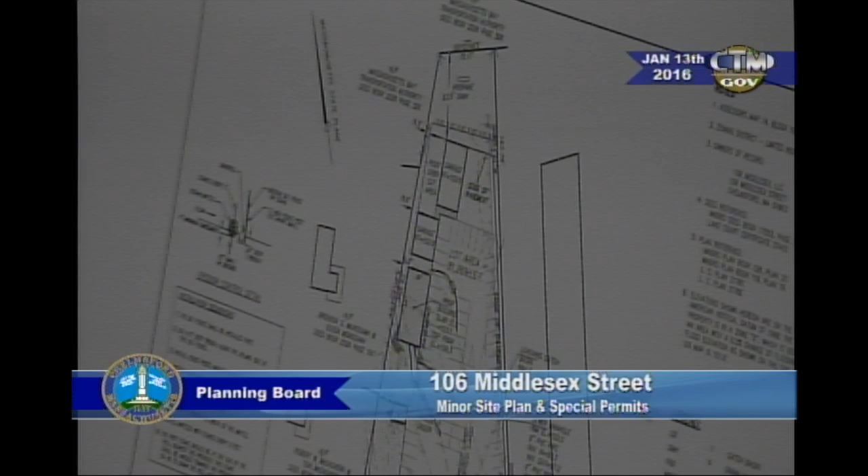They will also be repurposing a hallway to accommodate an elevator shaft through the existing ground floor. The new addition will provide a direct exit from parlor number 4 to the outside. There'll be a covered drop-off area, 21 feet by 28 feet, consisting of an open roof structure with decorative columns supporting it.

The elevator is being added to make access between floors easier. The enclosed elevator shaft will be on the north side of the building, about 10 feet by 15. The exterior will be treated the same as the rest of the building to blend in with the existing structure.

The second part of the project is a garage, a new building on the northwest corner of the site. It's a prefabricated metal building to match the others. The footprint is 32 by 54, 1,728 square feet. It will be 17 feet tall at the tallest point, and the new building will sit between two existing garages on the site.

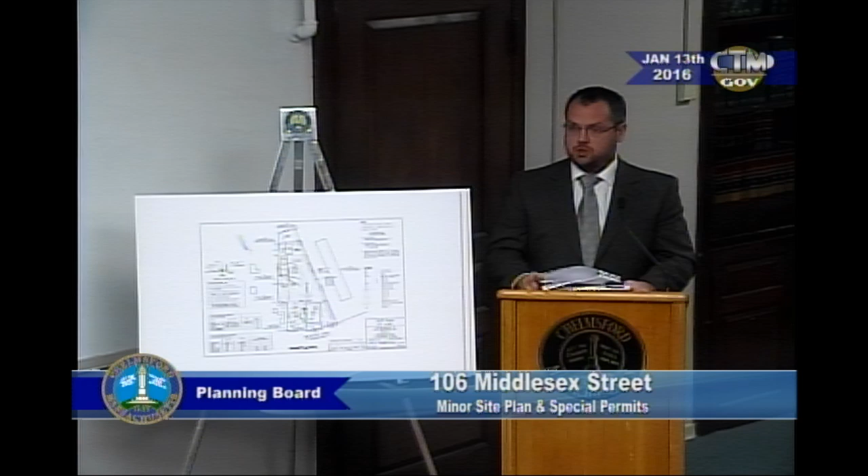Should I go over the items on the civil? We had the site plan, with all the corrections from the town engineer's comments incorporated into this last edit. Would you like me to go through the items on that?

Why don't you point out what we're adding there? I think I see it here, but what are we adding? I can see that, it's in here, adding this right here. I'm not worried about the elevator, I'm just generally worried about the bill.

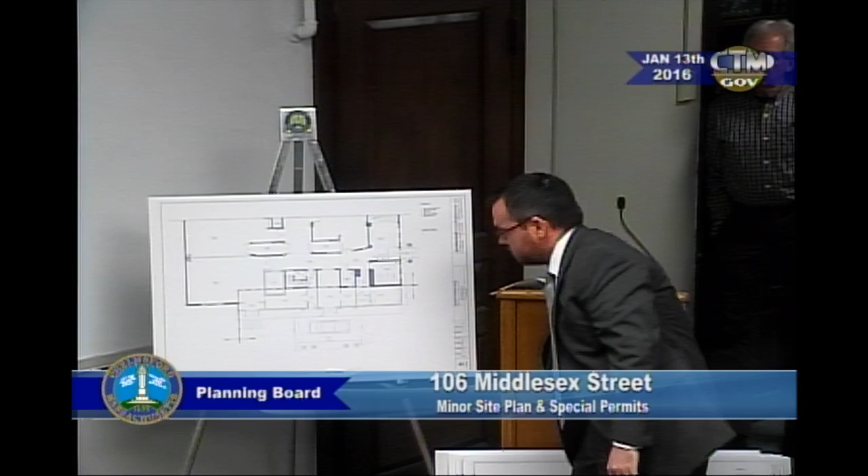This is the basement plan, so everything below the red line is the new footprint that will be in the basement level, an unconditioned space there. On the first floor, everything here will be new. There's a men's room here - this was formerly the men's room, so we're making this a hallway with a janitor's closet.

There's a coat room, a new entrance basically in the same spot as the existing glass airlock, a hallway to connect the stair, a storage room, and the new door here - this is the elevator. So basically all the pieces being added are just to increase the comfort level of anybody at the facility. We're not increasing any assembly area for this project.

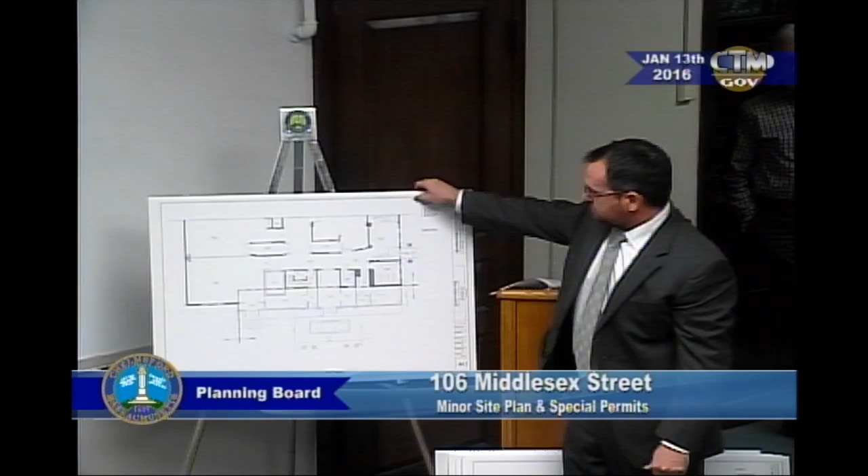This is the covered portico right here. And on the upper floors, this is the elevator shaft with a small vestibule there.

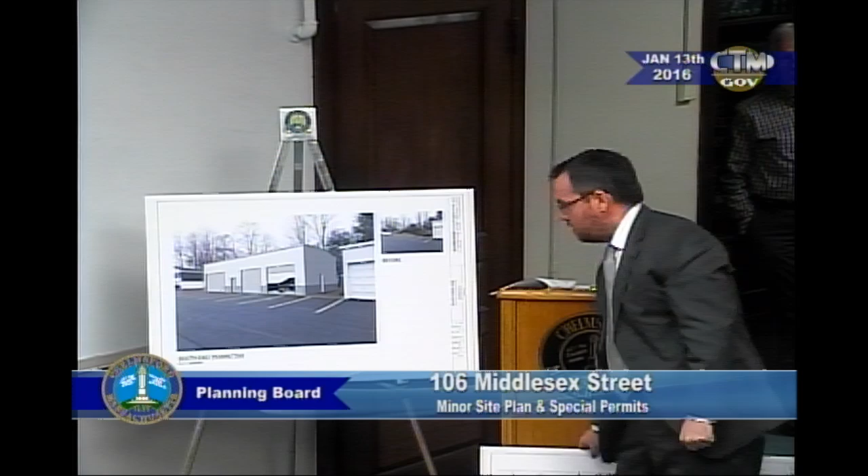I'm happy to go back to any board. Is that a 4-story elevator? It will go from the basement, it's a 4-stop elevator, from the basement up to the 3rd floor. This is the approximate floor plane of the 3rd floor - due to the perspective, it's sort of hiding the 2nd floor a little bit. It will potentially project a little bit from the roof of the building, but not too much.

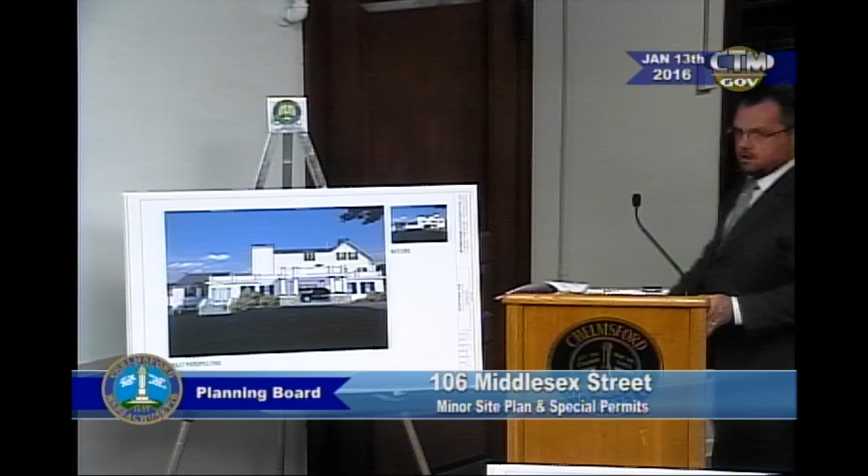Yeah, I'll go first. I do have questions about the parking, and I see that at least the entrance and egress of the site has been clarified, so thank you for doing that. I see that still some parking is going to have to be eliminated - how many spaces?

Basically, they'll be eliminating 10 spaces from the existing parking lot. We did a minimum parking requirement count off of the zoning for Chelmsford, and it does seem that we meet the minimum required of 77 spaces, with currently about 104 on site. So with removing the 10, which is a conservative number, we will still far exceed the minimum required on site.

The elevator, where's the high point of the elevator, is it under 35 feet? It doesn't project any higher than the existing house, does it? No, it shouldn't.

The only thing I got is snow storage, what do you plan for that? He has an area out back. There's a large paved area that I believe is the storage area that is not striped for parking. Okay, down back next to that last garage? Yes, is it where the propane tank is?

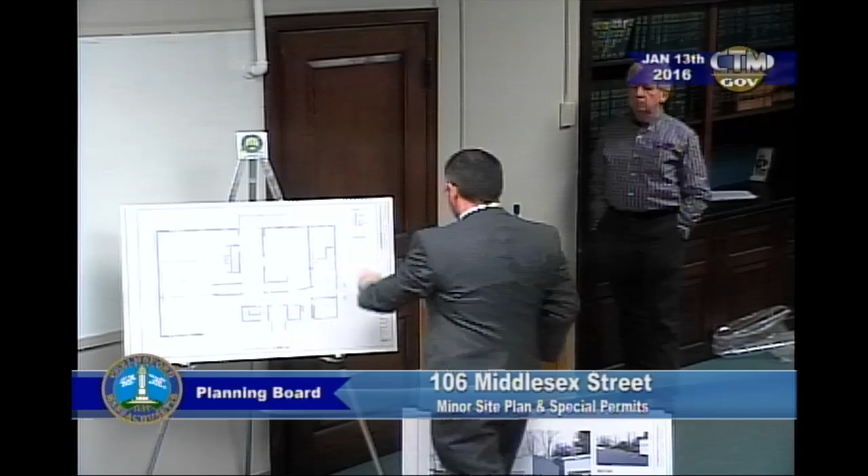My other concern, which you've somewhat addressed in the new plan, is the distance from the back of the garage to the house directly behind it, which I believe has a pool behind it as well. I know there are existing garages along that line, but it's not really a direct view from the back of that house. So the question is, how far is that house, and is there room to get some arborvitae back there, or something to soften the view to that residential property?

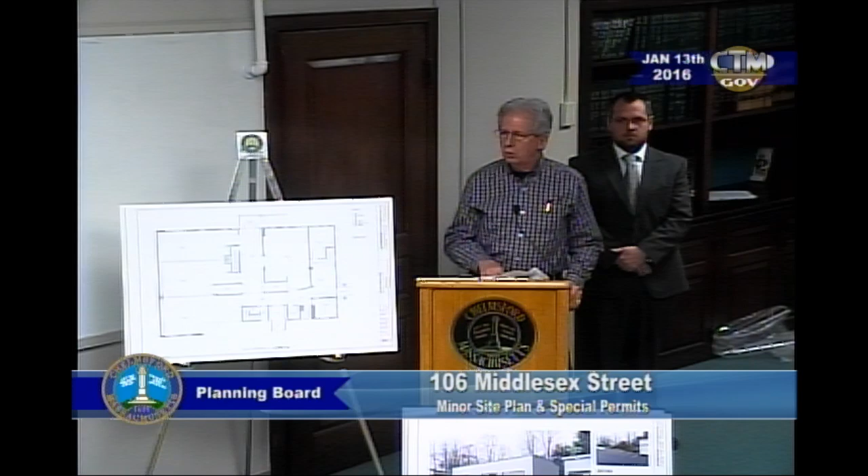My name is Jeff Hannaford, I'm with Norse Design Services. You're talking about the house directly opposite the new... Brendan McGovern. Okay.

I don't know if the picture down here, the before and after - can I see that one right there? Yeah, can I see it?

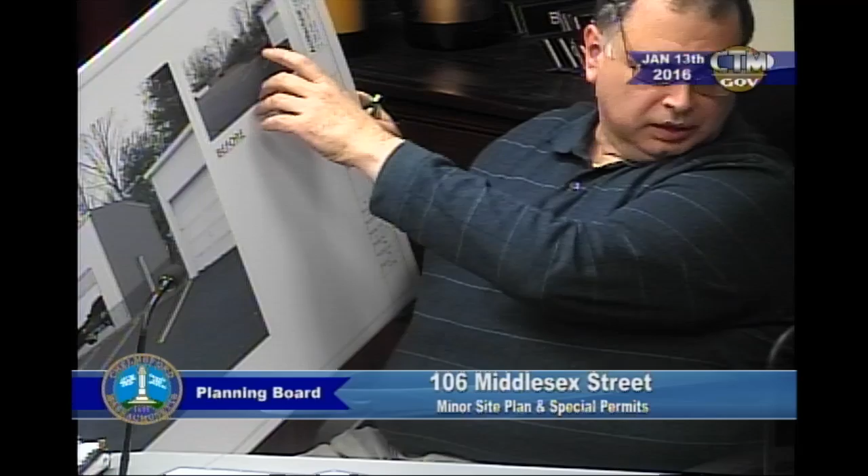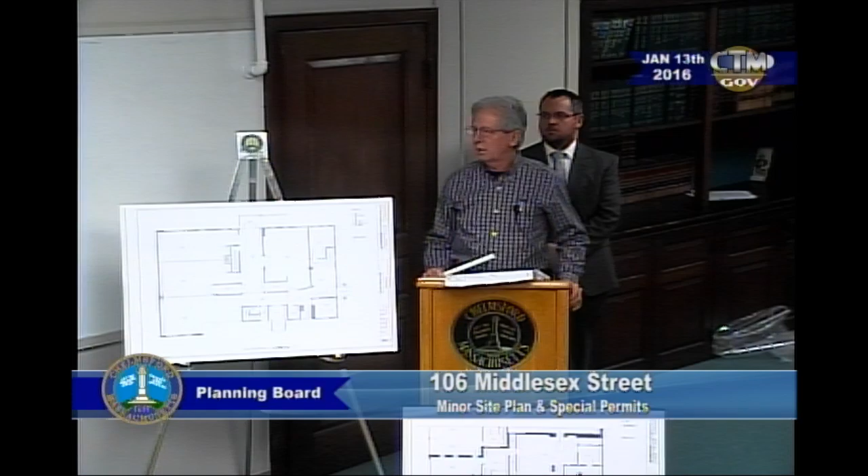So on your picture here, are these trees staying, or are they on your property, or on the owner's property? They're on the owner's property. The existing house is approximately 85 feet from the property line, so it'd be about 95 feet from the back of the proposed garage. Are you losing all those trees back there? None of them. You're not losing any?

Okay, I'm good. You can have that picture. Unless the board might want to see it. Yeah, might want to. No, show it. I can see what you mean, yes, I understand. Yep, I can see it. Got it. Okay.

Ed, you had another point? Yeah, just going back to George's point on the traffic flow.

You've got this as two-way traffic on both sides of the funeral parlor. Maybe you can consider this - I actually thought it was one-way flow myself. Maybe you could consider making this one-way counterclockwise flow around the funeral parlor, and that might answer George's question. I'm not expecting an answer now, I'm saying consider it.

When I've gone there, I always go in on the right-hand side of the funeral parlor and kind of swing around. And it seems like everybody's doing the same thing, so the natural flow might be that way.

And the other thing is just basically a compliment. I think over the years Dolan has done a great job with this property. I can remember when this was Proctor Lumber - long time ago - and the front part of the funeral house was the main office of Proctor Lumber. So that's a long time ago, but they've done a nice job with the property over the years.

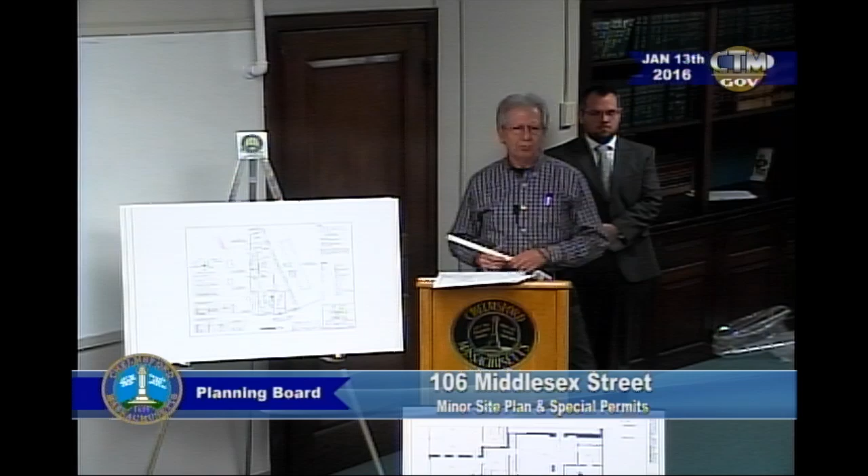Well, I'd certainly bring that up with our client. It was one of the questions in the engineer's review. So when we looked at it, it really isn't marked out in any particular fashion, so without any specific direction to motorists coming and going, it could be used any which way right now.

If we marked it out one way, it might solve the concerns. Yeah, I know your comment about having a walkway or adequate room for people getting in and out - that was one of his concerns. So for the portico, his instruction was to make it wide enough so that when somebody pulled in and opened doors to let people out, they had ample room on either side so people were safe and could get in and out easily. I think if you look at it, you see if there's some way to either mark it out or put a walkway in.

He definitely wants one way under that portico. I don't know if he has a particular desire which way, but I know it's supposed to be one way. Maybe we could do clockwise instead of counterclockwise - that might work better. That might make sense. Yep.

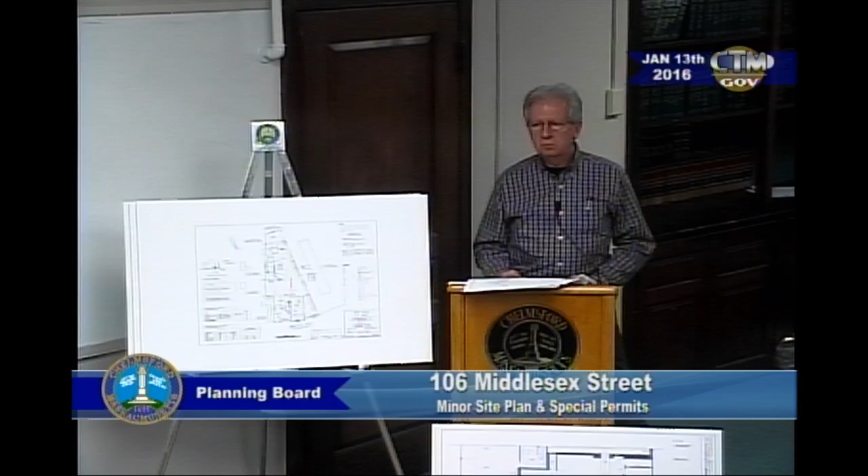And while I'm up here, I will say that I got the town engineer's review comments this week. The plan you have in front of you addresses that. Since I'm up here, if you have any specific questions I could go through them one by one. Even though there were a number of them, were they addressed? Yeah, minor in nature - they've been addressed, I'm pretty sure. I don't have any particular. Let's see, anybody else have any questions?

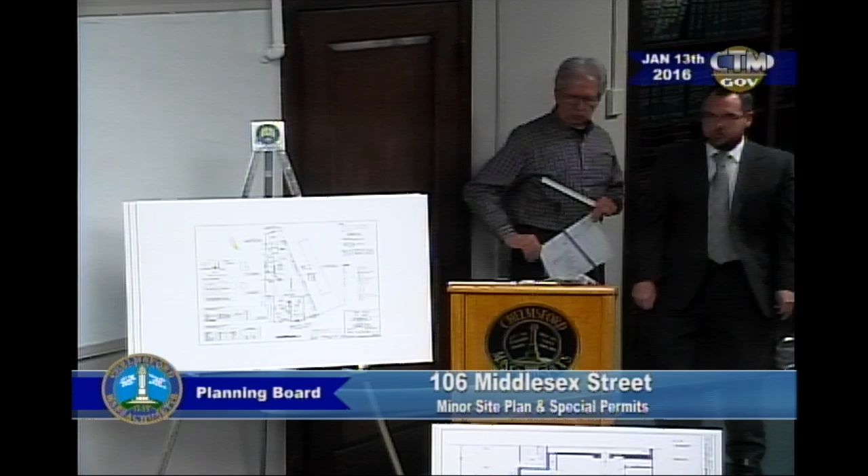I had one - I just wanted to verify the height of the proposed new garage. Is that essentially the same as the height of the existing garage? It's a little lower. Okay, so the new garage is 17 feet at the ridge and 16 feet at the lowest point of the roof. I believe that's very similar to the existing garage, except it is slightly higher on the hill.

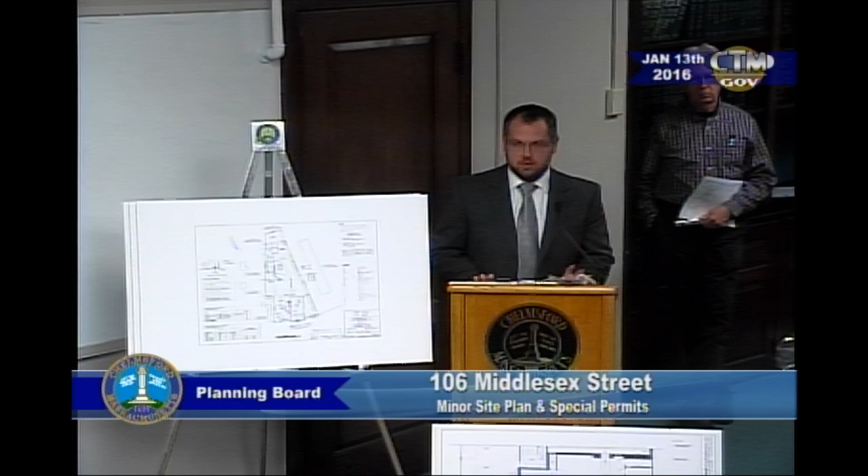The hill does slope very gently down towards the railroad track, so I think they're very, very close. I can see that - okay, anybody else?

All right, you did have a comment about a question about the garage and the grading, and that was also on the town engineer's comments.

As far as proposed grading, when we looked at that proposed garage, the back of it is going to be built into a hill. Because it was a prefab building, my concern was that we would need a separate retaining wall around the back of the building to hold that hill back. In talking with the architects, the solution was to use the foundation as a retaining wall, so the foundation wall in that area is actually going to be higher than originally thought. That will minimize any adjustment of grades. The only other proposed grading is associated with that building, nothing associated with the addition on the main building.

But as you can imagine, the garage has to have a level floor from left to right. The existing grade does slope slightly, so that grading will be adjusted immediately in front of the garage. It'll have to be cut out and repaved to match the new garage floor elevation. But they will be able to still continue to park in front of it, just like they do all the other garages, because they don't need access to it during any of the assemblies.

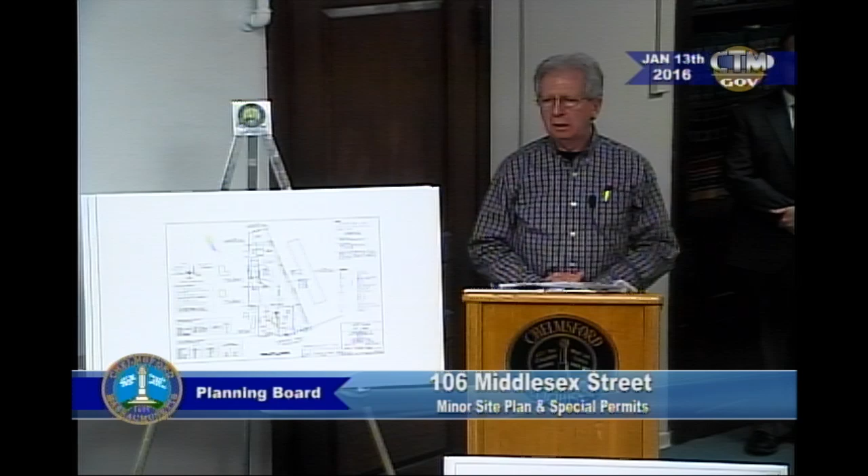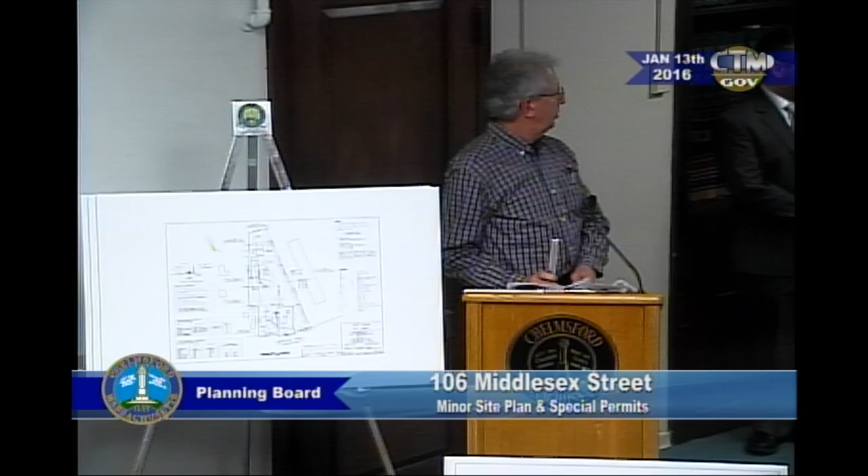Follow up on the garage. What is the intended purpose of the garage? Is it strictly for storage, or are they going to do repairs in this garage? I believe it's just storage, just car storage - the funeral vehicles. He's got some at his house, some at other houses, consolidating them all. So if it's strictly for storage and not to be used as an auto repair shop, I'm fine with it. I think that's something where we get surprises once in a while.

Once more around, and then I'll open up the public hearing.

All right, well, this being a public hearing, is there anybody from the public who would like to comment on this? Nobody? All right, seeing none, I'll leave that open for the moment.

Let's see, we have minor site plan, and there were 2 permits in here, Devin? One minor site plan and one special permit, one for the detached garage.

And when are you going before the ZBA on the variance? They haven't scheduled it yet. They wanted to appear before you first, but it'd probably be March, the first meeting out there. And when would you anticipate beginning construction? I presume that's in the spring? Yes.

So I just have a general question, 'cause Nan actually brought it up. What's the difference between recorded land and registered land? Same thing - one you have to go through land court, and the other is through the local registry of deeds.

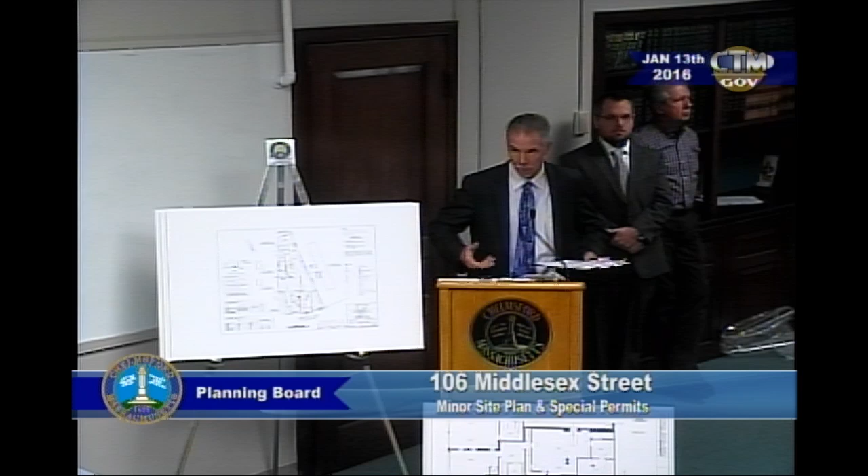One other last thing - in terms of the other comments on the package we received back, the owner has asked us to consider applying for a waiver from the fire department requirement. So we may pursue that, and I don't know if that needs to be part of the notes from tonight. If they're satisfied, we'll be fine. Actually, I think it has to be.

Because if we vote based on accepting their letter, and it says the standard sprinkler systems or whatever it may be, then if they change it, does that affect our decision? Well, I think we would need another letter submitted specifying what they want.

Normally, almost 100% on fire department stuff and all other departments, we require them to be satisfied. So before we usually vote, we need a clean letter from the fire department that says all the details. If you're increasing the size of this and they think you need a sprinkler system, you've got to hash it out with them as to what the NFPA requirements are. That's usually how we handle it - we don't overrule the fire department very often. It's not our modus operandi.

That said, I think the appropriate thing here is for us to continue this to the next meeting. You opened it to the public? Yes, we have had nobody step up. We can leave it open, and if somebody wants to speak to it at the next meeting, we can certainly let them do that. I would just like to see if they have enough time to work on the waiver, to continue it to the 27th.

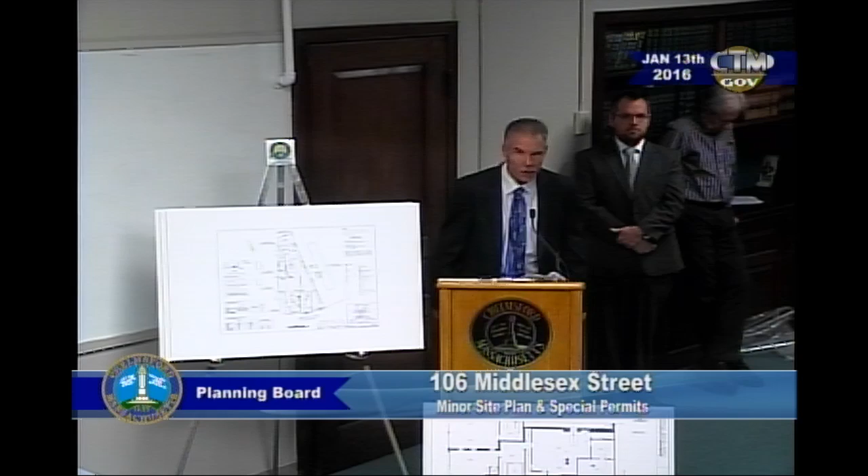Is that enough time for you? Normally, we continue it for 2 weeks to our last meeting in January, 2 weeks from now. You tell us if that's enough time, or if you want to go to the meeting in February. I think that's enough time. If you don't have enough time, you can just submit something to us before that meeting and ask for a continuance, and we'll certainly grant it.

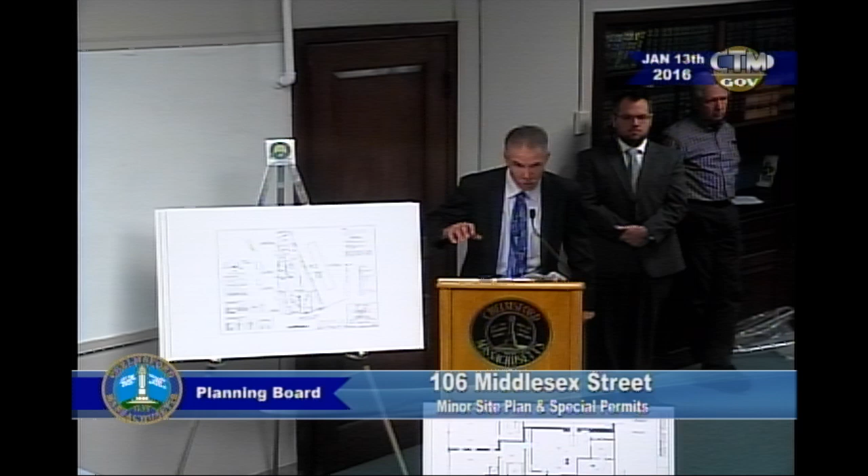That's great. I think also we wanted to ask, in terms of a continuance, would it be possible, if we're just talking about the funeral home as opposed to the garage, to get the garage piece approved tonight? Actually, I think that's a matter for the zoning board of appeals more than us - right, because of the setback. We'd want to handle it all in one transaction since this is a minor site plan. Well, you're doing a special permit for the detached garage, over 900 square feet, so that's going to be a permit by itself.

We usually do it all at once - that's our preferred mechanism if we can do that. But if you can read between the lines, I don't see much opposition here. I don't think you've got a problem. If you're concerned about timing, what we'll do is we can expedite the ZBA. There's nothing preventing you from submitting that tomorrow. You can probably get on the February 4th date. We'll be in contact with you tomorrow. All right, terrific.

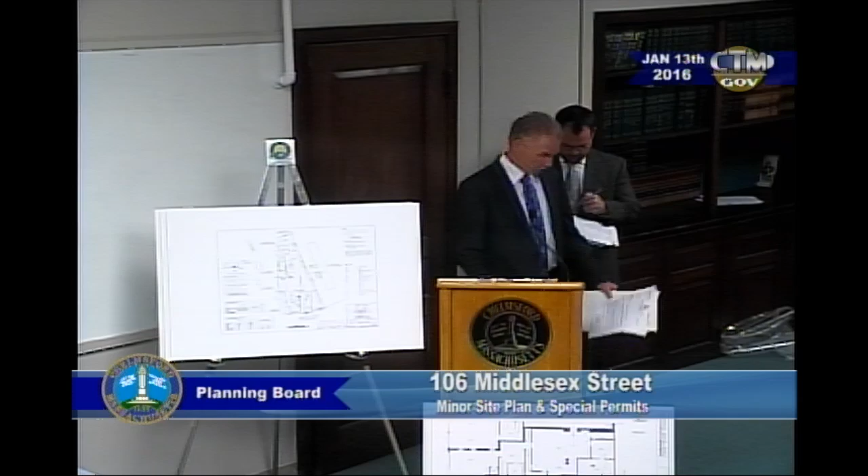Motion to continue - I'll make a motion to continue Planning Board 2015-21, 106 Middlesex Street, to our next regularly scheduled meeting, which is January 27th. I'll second it. Moved and seconded, all in favor? Aye. Opposed? Okay, 5-0. Thank you, we'll see you next meeting.

The next one up is a continued public hearing on 54 Bartlett Street.

Thank you, Madam Secretary. These are all the same. Ooh, Colleen's trying to give me a hard feeling - yeah, she put, they're all the same paper. There's like 40 copies, I'm like, you're killing me here. I'm sorry, you meant to pass those on to the board. It's gonna show up in the review. Oh, give me one more. I'll pass it down to Monica. Thank you, gotta read each one. Like, whoa.

Excuse me, okay you're up. I'll read this one real quick. From the fire department: Dear members, I've reviewed the proposal of the subdivision at 54 Bartlett Street in Chelmsford, and I find the following.

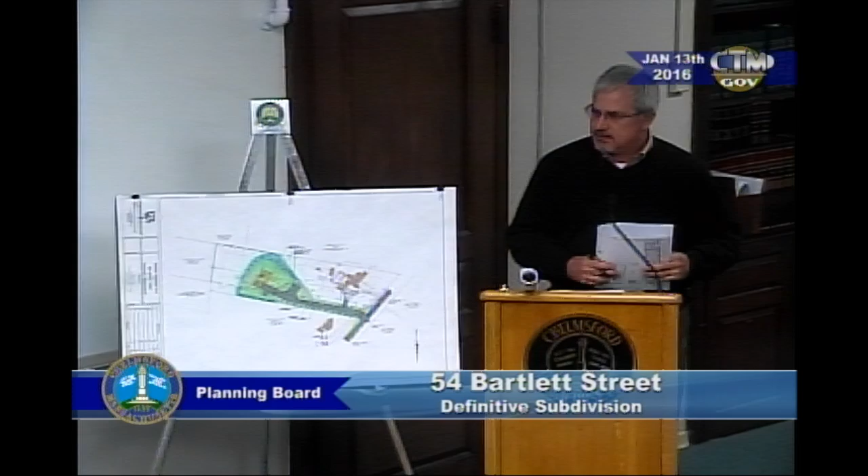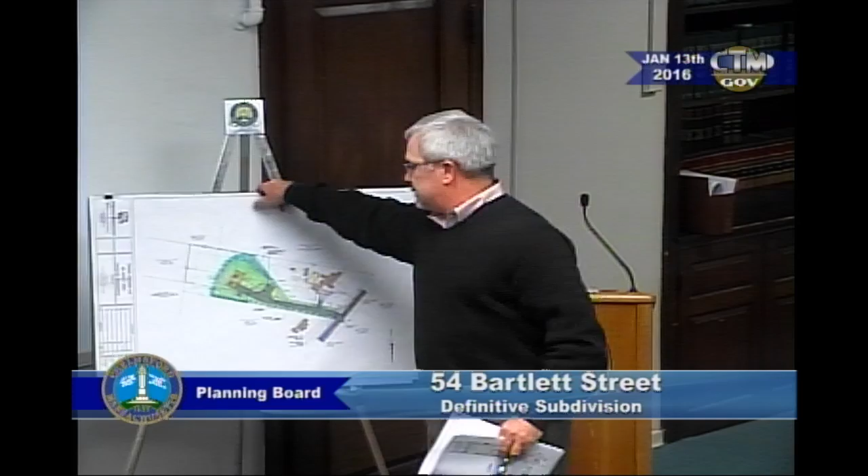Good evening, Mr. Chair, members of the board. For the record, my name is Brian Milisci with Whitman Bingham Associates, here representing, and with me tonight, Deborah Dunn, on 54 Bartlett Street. We were in front of this board 2 meetings ago, and if you remember correctly, we had provided a plan that showed a fairly large amount of pavement.

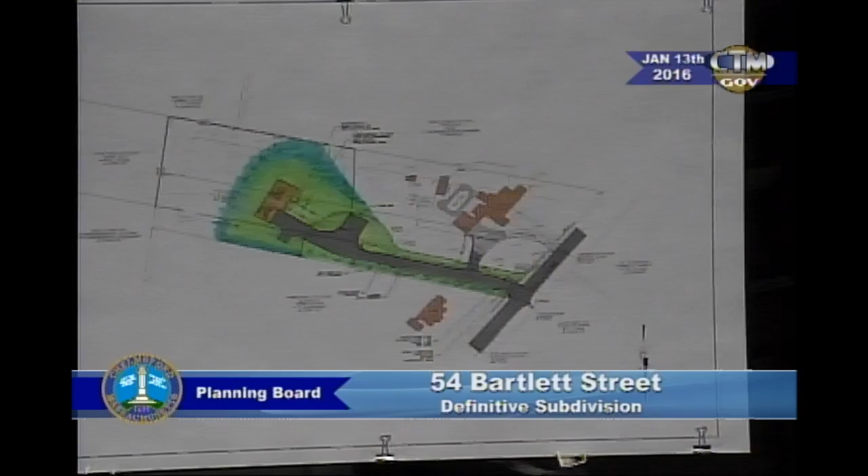Kevin, if I misspeak you can throw something at me, but from what I understand, following that meeting, Evan, Steve Yonley of the engineering department, and Captain Dan Katsufis of the Chelmsford Fire Prevention Department met and went over this. What came out of that meeting was the letter you just read, and Dan sent us a copy as well. The crux of the meeting was that fire prevention is okay with the 14-foot wide pavement width we had originally proposed on the plan, which the engineering department said was of adequate width.

What he did ask for, first and foremost, was that the new house be sprinkled - meaning have a sprinkler system attached to it like you would see in commercial, retail, or industrial type buildings. It's been unusual. I went over it with my client, and she is amenable to that.

To let this board know, I talked to the water district to find out how he wanted me to plumb it, and I don't know if the details needed to be shown. Typically what we would do as engineers, on a residential sprinkler system, is provide an oversized service - we'd upgrade the 1-inch service shown on my plan to a 2-inch service that would come into the house to feed the system, and then come off of that with the 1-inch domestic service.

Typically what would happen is it's more of a housekeeping item - if someone didn't pay their water bill, you could go turn off the domestic service, but the fire service would stay alive to the building. It's a residential home, but that's typically what that's for.

I talked to Mr. Tanzino at the Chelmsford Water District. He said he can only remember one other instance where they put a sprinkler system into a residential home. He was going to pull the file and get back to me on exactly how he wanted me to plumb it. I just wanted to let you guys be aware of that.

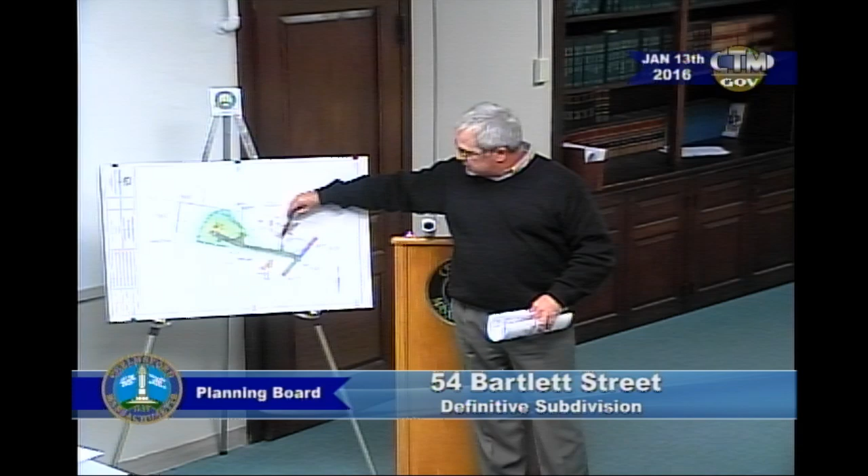One of the items that was brought up on the community development review letter, they asked us to look at removing the existing curb cut for 54 Bartlett Street and tying the existing driveway back in, making the driveway here a true shared driveway. This plan does show that.

However, we'd like to point out there are actually 4 fairly large trees in this area. One of them gets really close to the proposed driveway. We may not be able to save it, although we're going to try. The driveway would have to skinny right between a 12-inch spruce and a 30-inch pine. So the bottom line is we'd like to try to keep that driveway out onto Bartlett Street to save some of those large mature trees.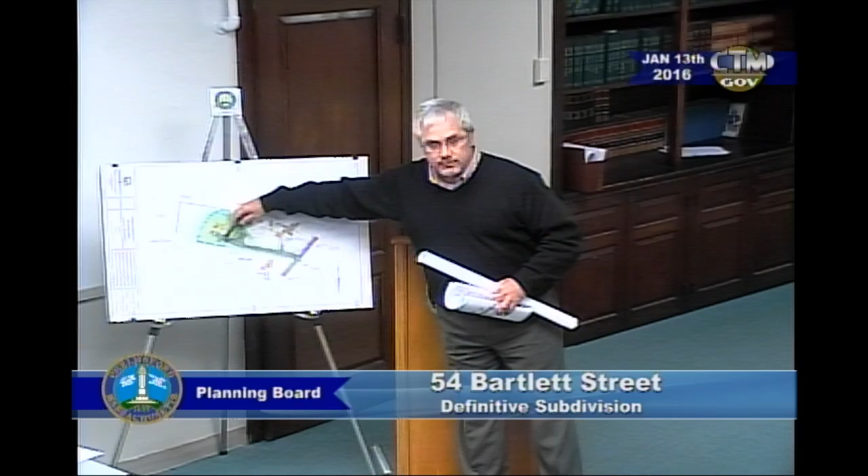We can do it from an engineering standpoint, it certainly can be drawn and constructed. We'd like to ask the board their consideration to leaving the driveway there and just having the new driveway service one home. Can you flip it so we can see what the old driveway looks like?

Okay, I see what you got. So that's the old driveway. If you go out there today, this is the existing driveway that services 54 Bartlett. There's a little bit of a spur here for coming out of the driveway, where you can pull out and maneuver around. I believe it was Evan who brought it up, asking maybe we can connect these, and we're just trying to save some of those trees.

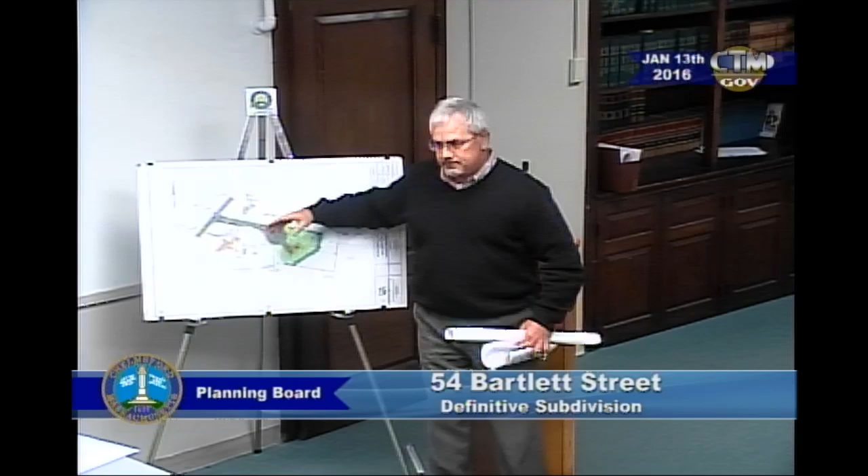The other thing that was brought up, I believe by some of the abutters, was the green space between the edge of pavement and the property line through here.

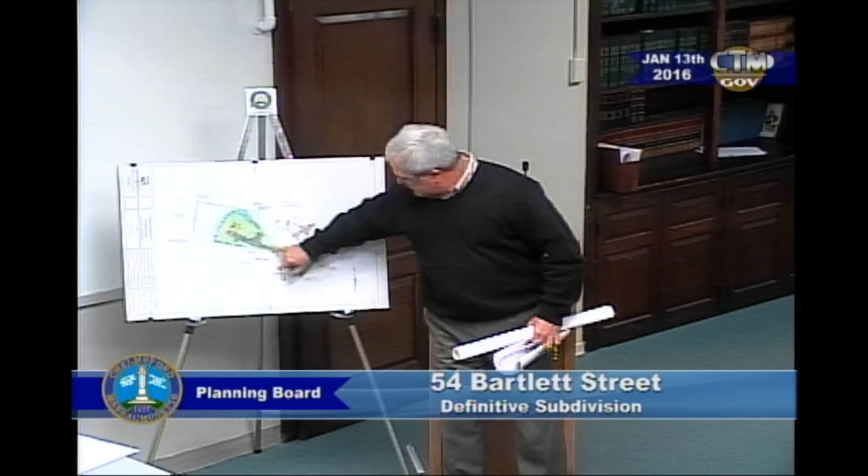This board had asked me to stake the center line of the road and stake the house location, which we did. We let Evan know that it was done. I don't know if any board members have had a chance to go out there and view that, but there was talk about maybe putting some arborvitaes out there. I believe after the meeting the term came out that this really isn't an arborvitae neighborhood.

We're certainly amenable to putting some landscaping there, hydrangeas and some azaleas that Deborah said was on the property now. I believe it's hydrangeas. So we would put some hydrangeas and whatnot here to try to soften some of that edge between the driveway and the abutter. In a nutshell, that's it.

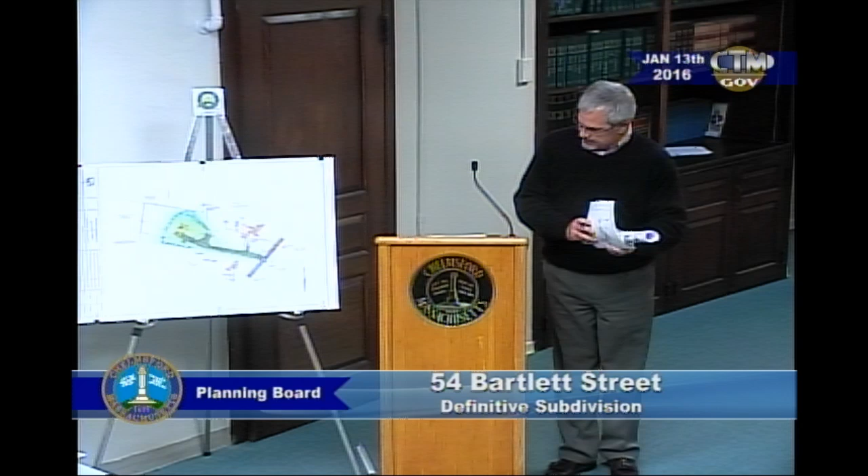We were kind of waiting for that volley back from the fire department to see whether they were going to be amenable to the 14-foot wide driveway. I talked to Captain Dan, I believe, on Friday when he wrote that letter. So we're here in front of you with that.

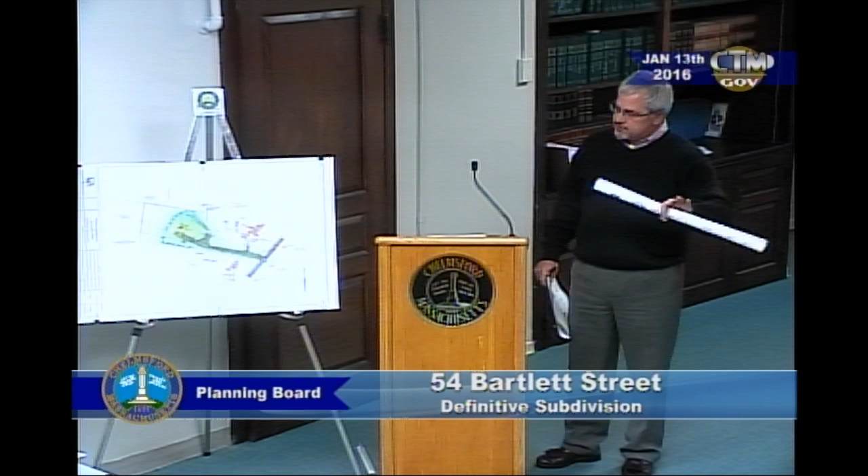I do have small 11 by 17 portions of this plan and a couple large ones. I do not have an entire set of plans that have been revised yet. I was hoping to see if there were any comments from the site walk, that we might be able to incorporate one last revision onto the Mylar plans, and hopefully get an approval. That's what I have.

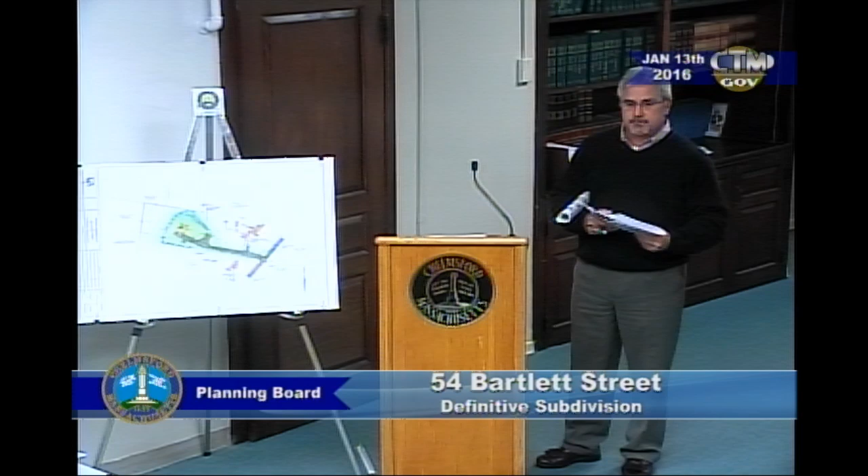Just, I guess this is more towards Evan. So, well, maybe Brian can get the better answer. So this is the new trade-off: if we go to a small driveway, the fire department's now requiring a full-blown sprinkler? This is the new trade-off?

So we had a meeting, as Brian mentioned, and the Massachusetts Comprehensive Fire Safety Code apparently was amended probably late 2013, early 2014, became effective immediately, and they've been going through trainings and so forth. But the new change is fairly significant. It defines what a fire department access road is, which the fire department is interpreting to also include driveways. In this case, it's not just a driveway, it's also a private road.

Right, it's a private road. And so it indicates that a minimum width is to be no less than 20 feet. It also has some other design standards, and it gives the fire department discretion to modify those standards with the condition that they can require sprinklers. So generally the concern is the length of the access road from the main road to the point of the structure.

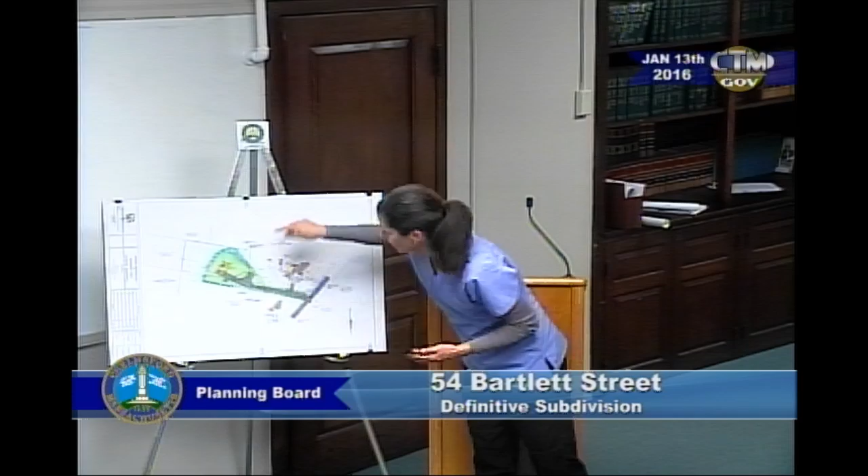May we flip this over to the other side? So when you say the shared driveway, can you explain that a little bit more? It would be Deborah's driveway and... is it okay, Mr. Chair, if I just kind of respond directly? Yeah, please do. The shared driveway part came through one of the comments from community development.

Rather than Deborah's or number 54 having their own driveway, this portion where it's shaded would have been removed - that's the existing driveway - and a new piece of driveway would have been built here, so that when someone was exiting number 54 or coming in, they would exit onto the new road and then go wherever they were going.

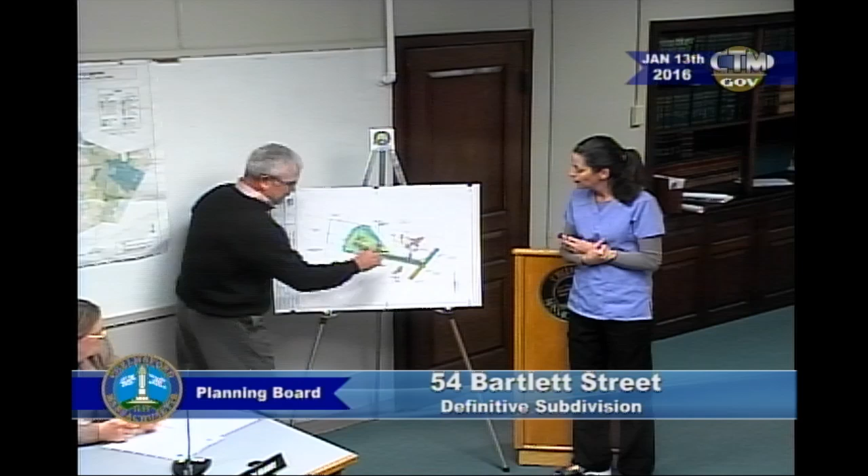It was asked of us to look at that. What we said just a little while ago was that we would rather not do that. And I was remiss - I think somebody brought up the fact that someone exiting this way, those headlights would shine kind of at the house. If I'm paraphrasing, they said they were okay with the two separate driveways.

So this portion would not be constructed. Oh okay, so the driveway will stay as it is now. Okay, so this shared driveway term would mean both the new house and number 54 would share this driveway, so that term came into play.

That's right, not the case now. Okay, so this driveway services... I didn't even realize this was discussed this way, because the lights would shine this way on our house. Well, we were talking about the lights coming out of here too, so in both directions - I didn't even realize this. Oh my goodness, so this is the existing driveway now, do I have it correct?

And she comes in here and parks here, and this is her garage, her house here? Yes, this is her garage. So what you're proposing now is this and this, do I understand it correctly? No, no, we've gone back to the existing plan - flip it over, Brian.

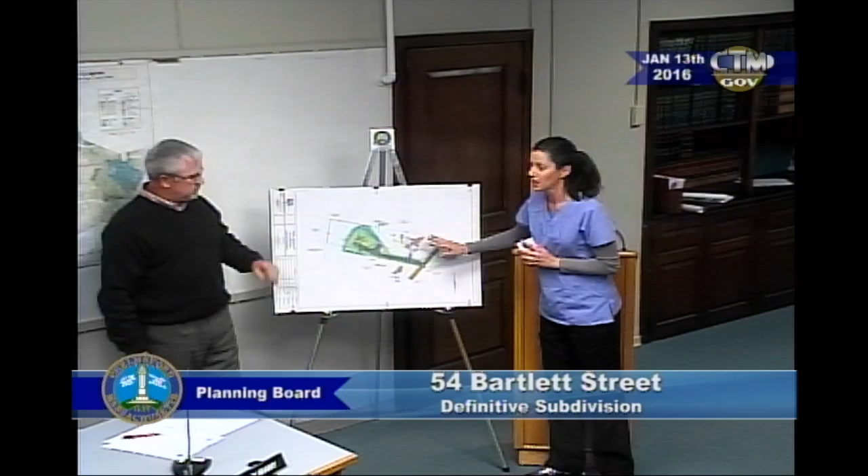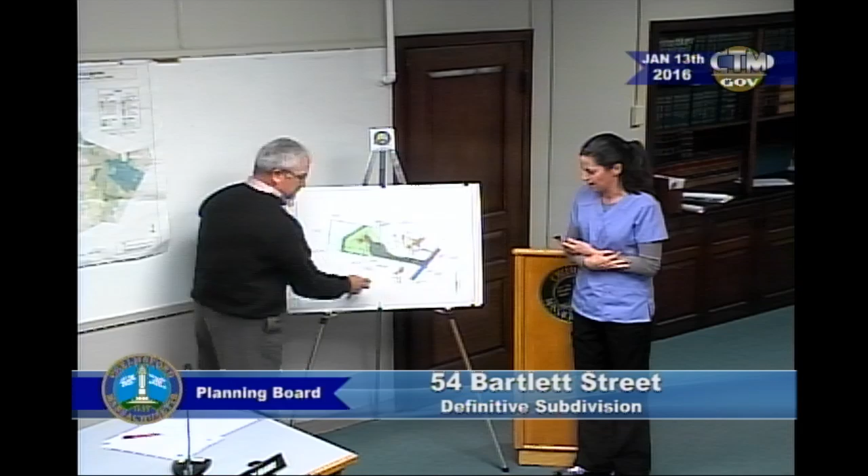Well, unfortunately this is the first plan we had last time, it had the large pavement area. This driveway will remain exactly the same, it will not connect. They asked us to look at the combination. Correct, we were asked to look at that, and while we looked at it, we asked the board if we would rather not do that.

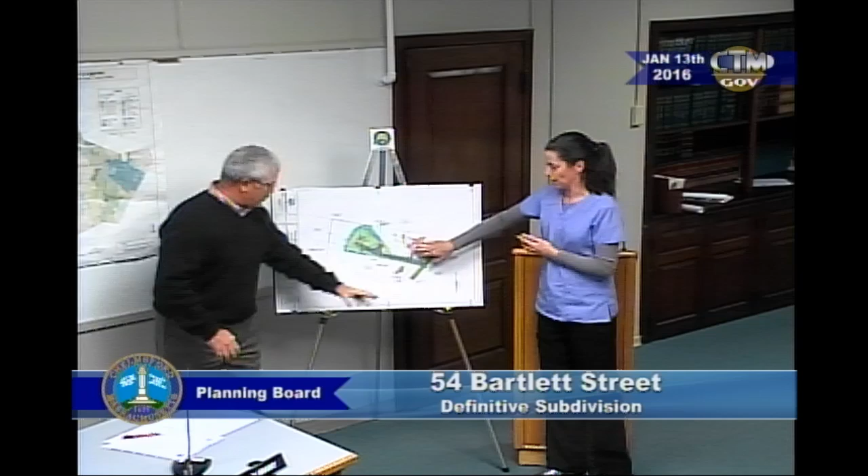So then what is the plan to move forward with, just coming in here? There's a 14-foot wide driveway that'll service the proposed house. This portion is what they refer to as the T-turnaround, or the emergency turnaround that the fire department requests.

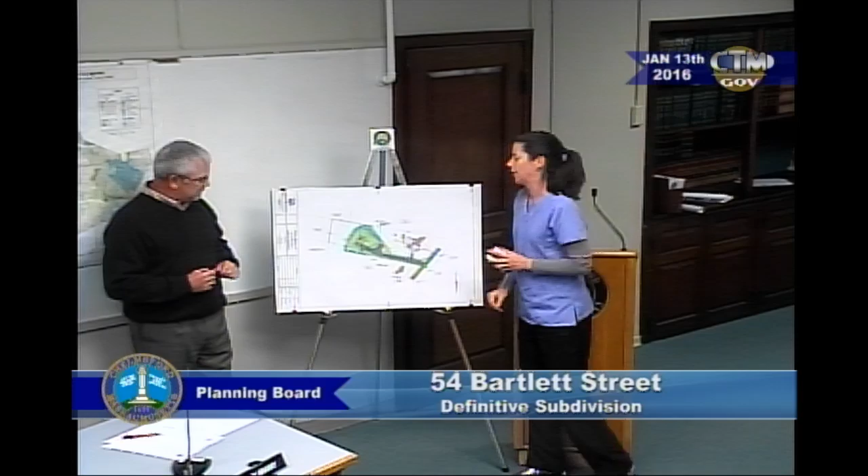So instead of the big circle, sorry to interrupt, instead of the big circle you just would turn this way now? Correct. Okay, got it, thank you, sorry about that, I didn't even know that other one was... okay, so still, I guess that...

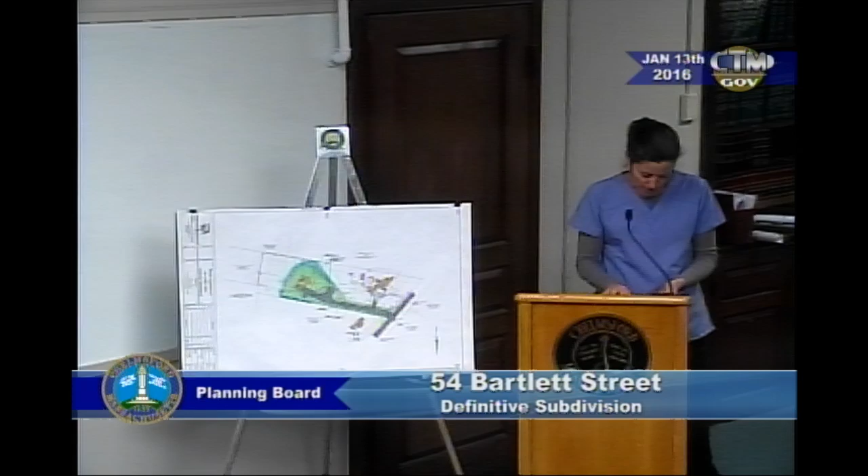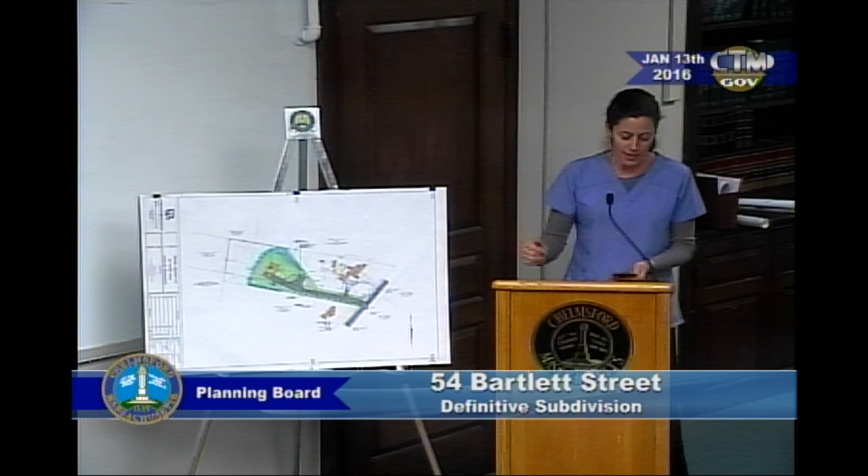One more question regarding what he mentioned tonight, which was new. I understand that now, because the fire department is allowing a smaller driveway for the new house, you would need the sprinkler system in the home.

Engineering wise, will that affect our plumbing in any way? Is there a lot of plumbing that has to go, or water, or anything? No, that won't have any effect on you. Okay, that's fine. Thank you.

So, my husband and I would like to ask for the consideration of the following points, and have them included in the land development process and plans if possible. Because this project is very close to our property line and will directly impact our property, we are requesting these items. Number one, the orientation of the driveway.

So the headlights of the cars will not be shining directly into our windows, that being the back of our home and yard, and the cars coming out of that driveway will not be driving out in direct line with our backyard where our family works and plays.

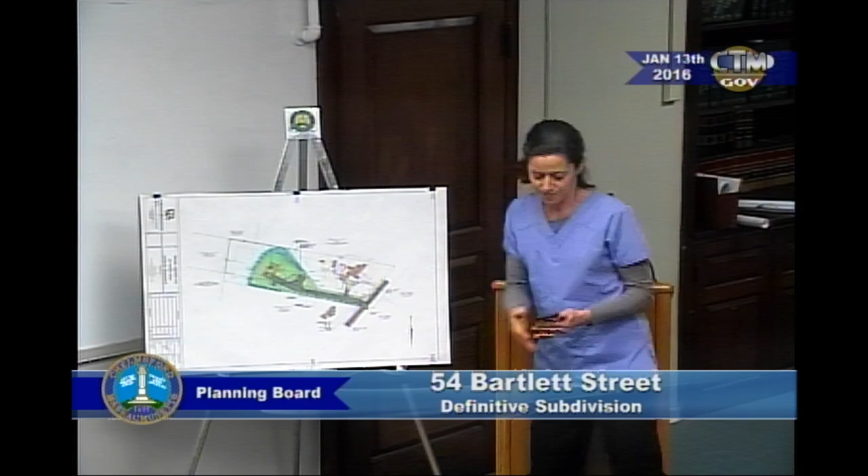So we were talking about this: the garage is here, and coming out is shining right here. This is our living room, and this is our basement, the bottom floor, top floor, and bedrooms here. Our garage is over here. So the orientation of the driveway would be the first thing, because of the lights and the cars coming right out there.

Next point: orientation of the house, the newly built house, so as to not be directly facing our home, windows, and yard.

So in my kitchen, it's a clear view right back to here. We were hoping that this orientation of the home could, I don't know, be in a different direction. That's what we mean by the orientation of the home.

And then thirdly, screening by trees and other natural structures to provide privacy between the homes and driveway, and to blend this large private driveway in with the beauty and historic feel of this old street and neighborhood. To remind you, this street is lined with old trees and stone walls like found on declared scenic roads in Chelmsford. These natural screenings we are requesting, for example trees that may not lose their leaves so they provide privacy the whole year through, are requested along the driveway and between the properties, in a natural way to provide privacy and protection from the driveway.

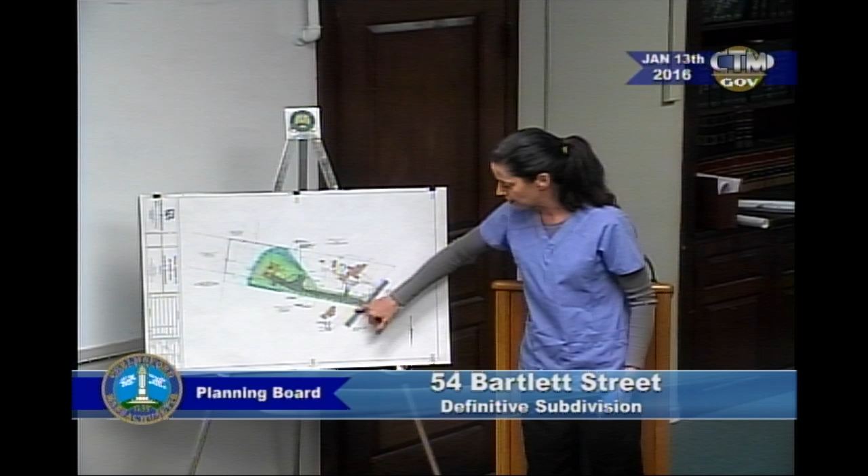And then fourthly, protection of our current trees along the property line, especially near the front of the stone wall. Near the front here we have trees right alongside of this stone wall right here.

And we were wondering if there may be a site visit. We had discussed site visiting, and I believe the driveway is staked currently. Do we want to take a site visit up there, or have people already taken a look, just gone by? I've driven by and taken a look. Okay, I can drive by. I haven't driven by yet. I assumed we were talking about a site visit, that's why I didn't drive by. And I'm perfectly amenable to a site visit, although I think I have a pretty good idea from what I see.

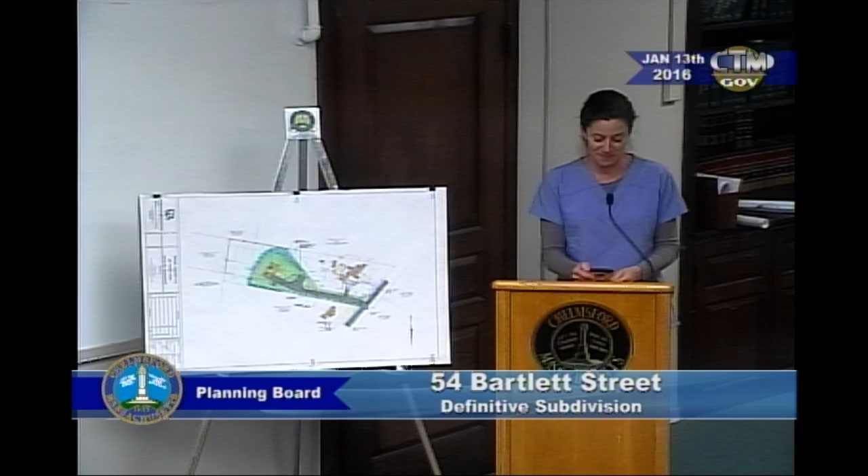I just wanted to, and lastly, thank you very much again. I just, in driving around, started looking at private driveways, long private driveways where the houses are in the back, and typically there's lots of trees, it's lush, on the sides of those long driveways. Unfortunately there's not enough room there for it, but anyway, thank you.

No, it's just, as far as the house goes, obviously I put kind of a standard new construction, quote-unquote, house on that.

It's more than likely not going to be the exact style house that goes on there. We have found that trying to write a condition stating exactly what kind of house, or exactly what orientation goes in there, kind of gets a little befuddled. I mean, there's the building envelope that we put in here. I oriented the house such that it would face the driveway and face as much to the roadway as possible.

The amount of traffic coming out of that single-family home - while we're respectful of the headlight issue and the shining in, we're 100% amenable to buffering the edge between the driveway and the property line to provide screening as much as possible.

But I found that with the T turnaround now, rather than putting massive pavement in there, the T turnaround works better as shown. I tried a couple of scenarios coming off that T turnaround into the driveway, and it seemed better to work this way.

That's not to say somebody comes along, buys this lot, and has a house plan showing the driveway or garage flipped - that can be attained. However, trying to write that into a condition is something we'd want to look at very closely, since it starts to diminish the value of the lot.

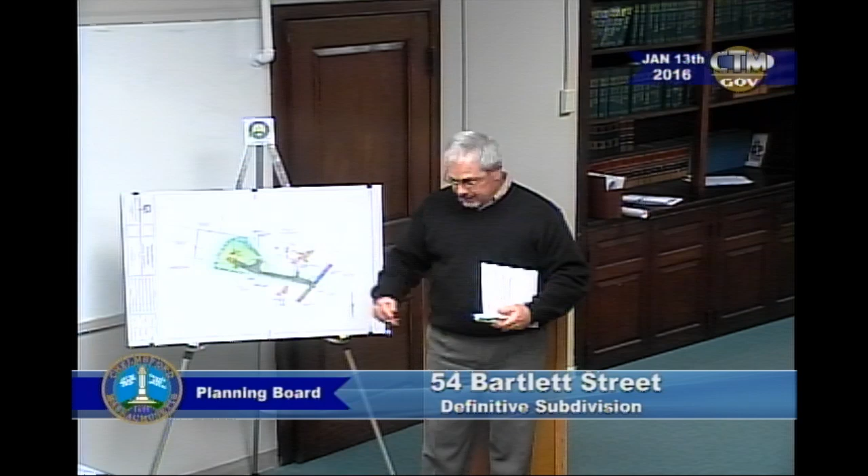And of course we're not hiding anything, we had it staked out. We're certainly willing to go do a site walk, but in respect to my client, we just kind of want to keep the process moving along.

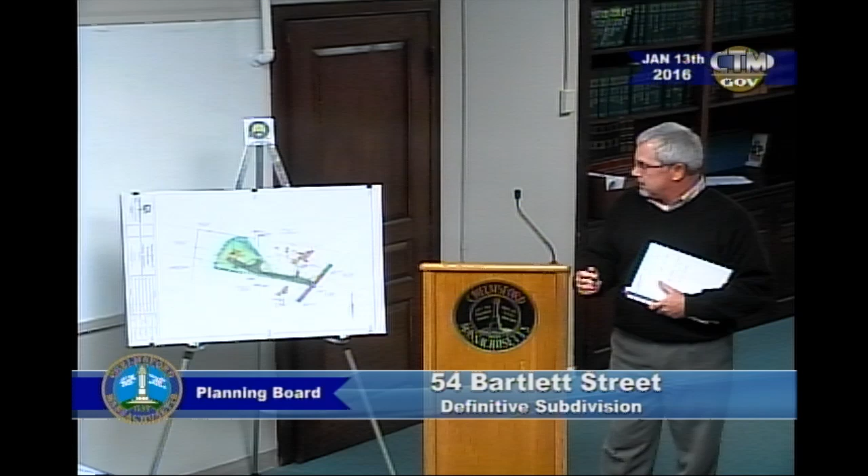We had to meet with the fire department, and I appreciate having that meeting, so we skipped that second meeting in December to come to this meeting, and we'd just like to keep this moving along.

I had a question for him. Brian, between the driveway and her property, how much you got there? On this side, between the driveway and the property line, where the green area is, where you're gonna put the trees? So it's 20 minus 7, 13 feet.

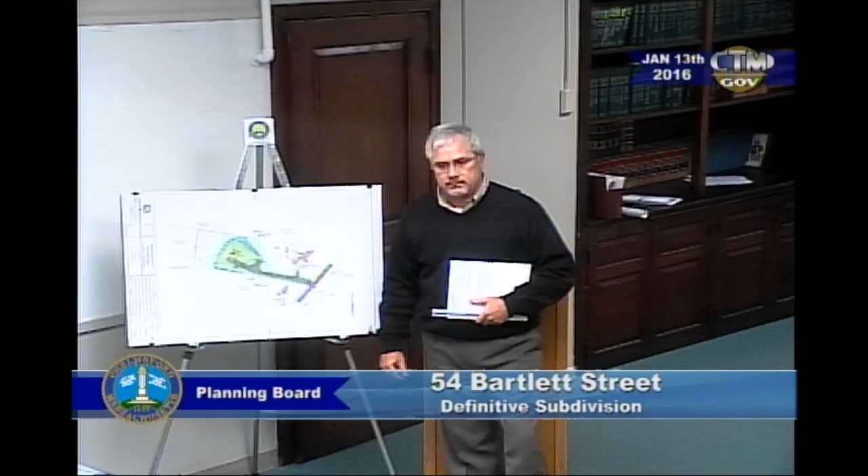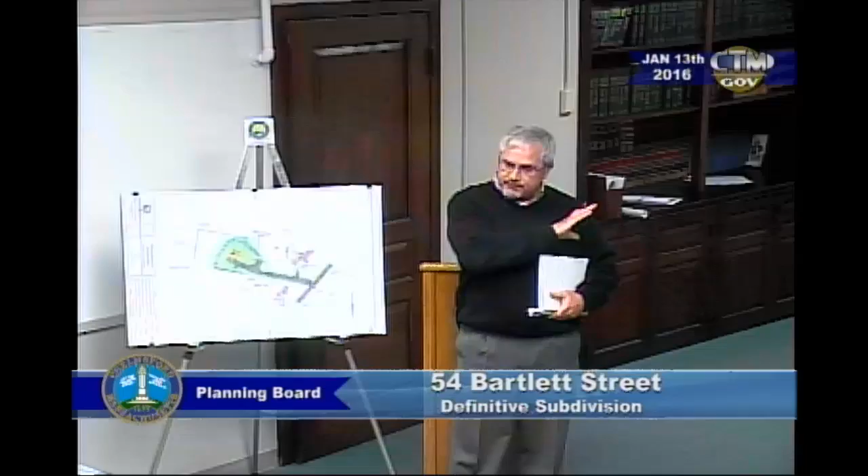So you've got enough room there, you could almost put a berm down there and a bunch of white pines on top of it. You wouldn't even see that driveway - that'd block everything. Rhododendrons would be denser too - get rhododendrons to look good up on a 5-foot high or 4-foot high berm, that'll block everything, all the lights out, you won't see nothing.

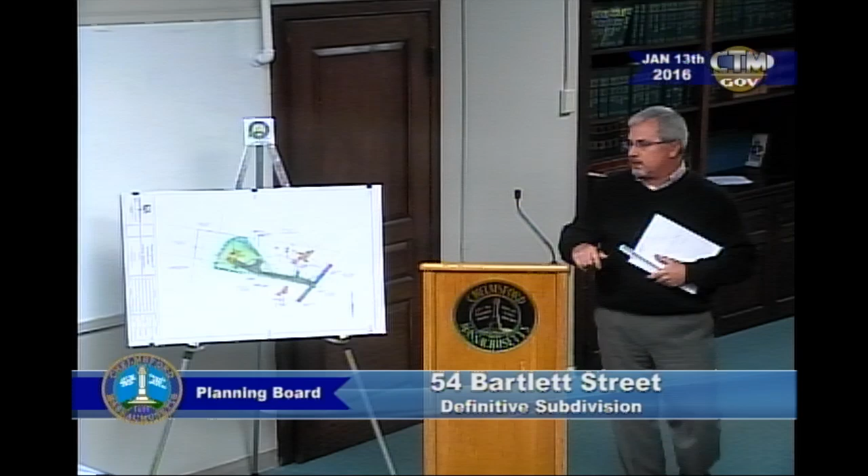So it kind of met the definition of an evergreen, but this isn't an arborvitae kind of neighborhood. And I think somebody mentioned going with hydrangeas or something along that line - but hydrangeas don't stay green, rhododendrons certainly do. Just don't say oak trees. I don't care, it's not a parking area, it's not high-density construction.

You could put oak trees along there, but pin oaks aren't really the definition of staying green.

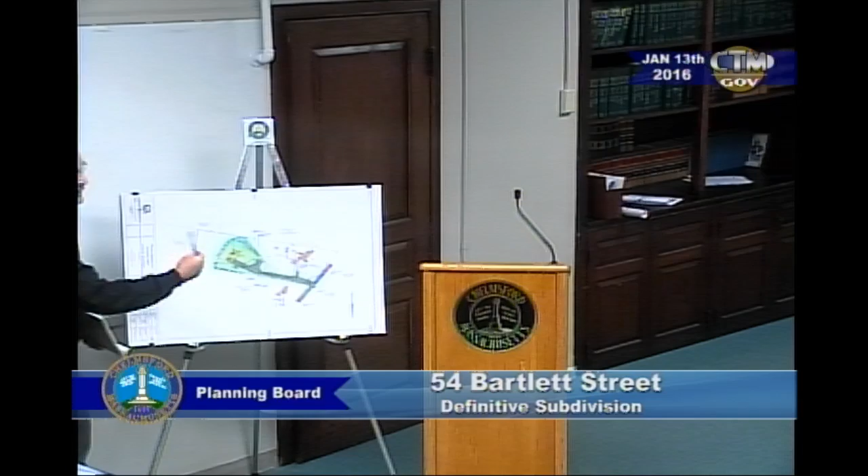Just so everybody knows, the public and the abutter knows - if we approve this, what's the building envelope? Point out the building envelope for where the potential house could be. Just go around and draw the rectangle - we described it by taking the front, side, and rear setbacks. So the building envelope really is that. To meet zoning, that house could actually be placed anywhere within that envelope.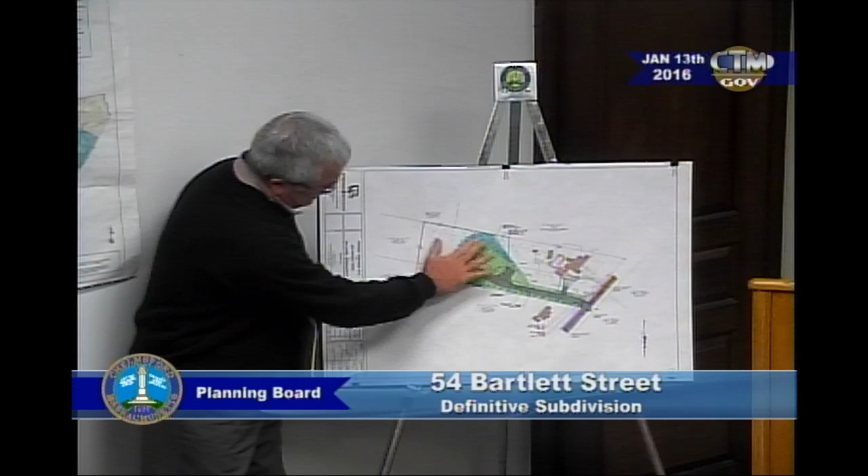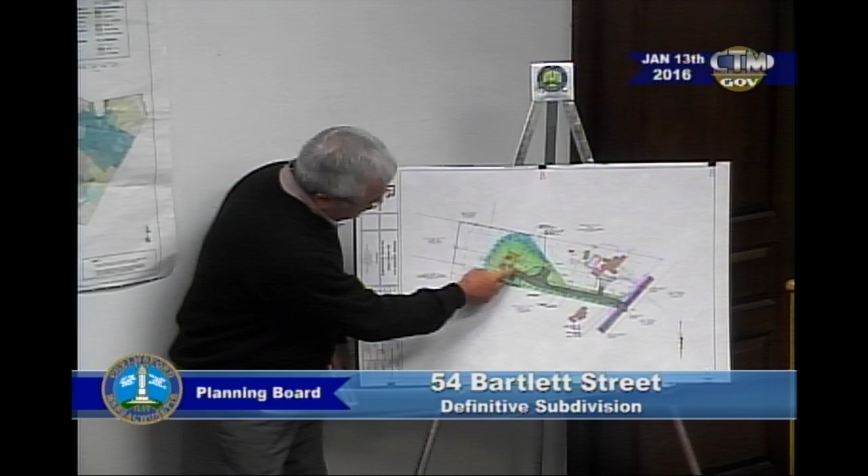Now what we try to do is look at the length of driveway, the amount of green space and trees you have, so I'm not right on that front yard offset - I'm a few feet back, which is comfortable as far as zoning goes.

What I wanted to point out for the abutter was that if this is approved and somebody buys this and builds this, that house could be any place in that rectangle. The driveway is pretty much where it is, but the house can be moved around - that's the only place for the driveway, but the house can be moved around with the builder, maybe a couple years down the road.

I agree with Glenn's idea, I'd go along with a berm - what did you want, a 4 or 5 foot high berm? No, that's pretty tall to get 5 feet. Whatever - it doesn't even have to be that high.

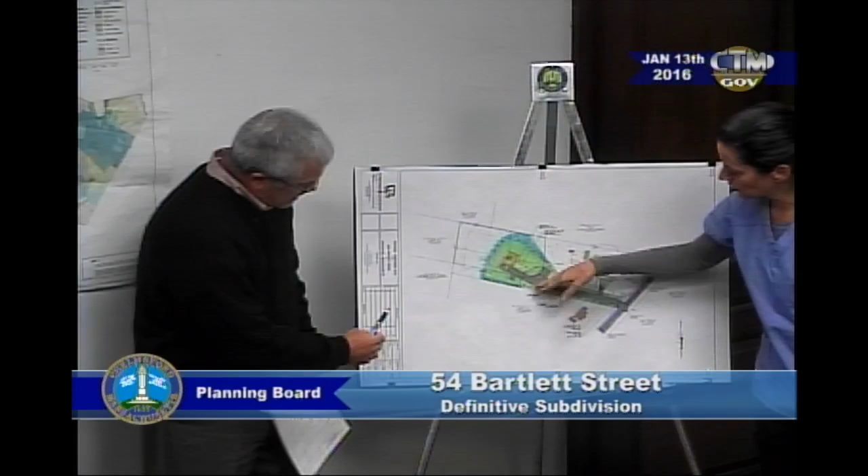Four feet would be plenty high, I would think. Yeah, 3 or 4 feet, planted with rhododendrons. Are you talking about along here, and also what's going to be done with the privacy of here to the home? We can't solve it all, probably. We're trying to minimize your cost on it.

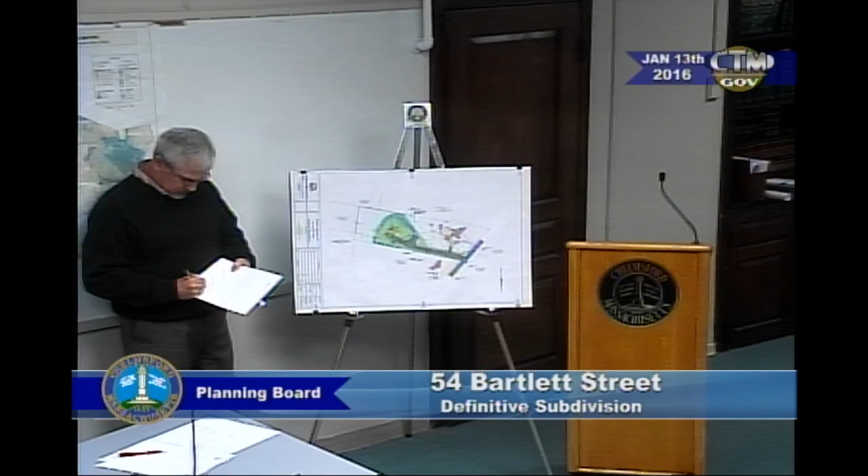What you can do, I think, is coming up with a berm, which is not too bad. I wouldn't put a number on it, but berm it to help minimize, along with some plantings, maybe from where the fire department is to just about next to her house. That'd kill the headlights pretty well. Yeah, you wouldn't see them with something on top of them.

Because of the existing topography and some of the grades they have to do, and some other site issues may impact that. So what I'm hearing is a 3 to 4 foot earthen berm from the T to the house, measured along the proposed way, planted with rhododendrons.

Or equivalent, or other dense evergreen. And then maybe something to the effect of, with the coordination of the abutter in the field, something to that effect, with approval. That make sense? Yeah, no, it does. Okay.

Because the berm may be 50 feet in length, but maybe the real sensitivity for the view shed is a specific point. It's a nice way to do it, because you can actually walk it in the field, find those particular areas, with window placement and things, and say the screen works better right here.

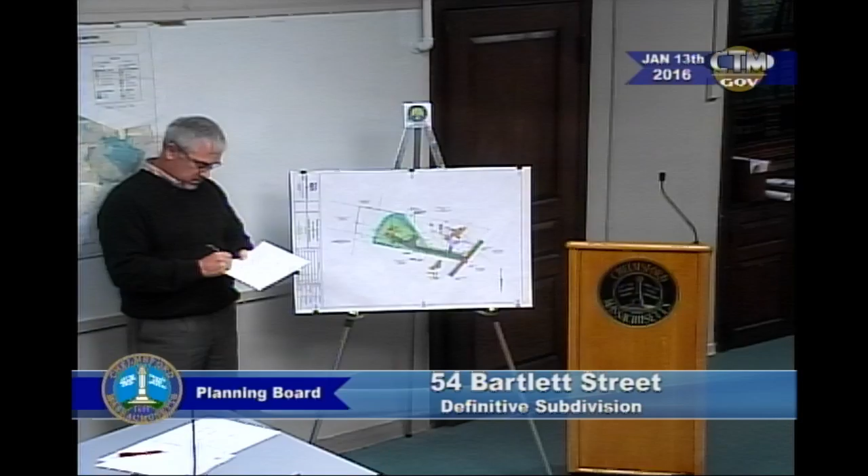No cut zone? Is that what you're going to say? No cut zone, within the setback, maybe some arborvitaes or a few extra plantings back there to kind of shield her a little bit from the house. But there's mature vegetation back there, right?

The difficulty with planting any new arborvitae or rhododendrons under mature oaks is I'm assuming they die. Yeah, all right. Well, okay, no cut zone, a no cut zone.

Yeah, and I think we talked about that before, within the setback, which is 30 feet back there or something, right? So a 30-foot no-cut zone on the backside of that lot is not unreasonable. That's out of your envelope anyhow.

Unless there's trees that are sick or dying, and then of course you maintain your plantings. Okay.

Could you give me some clarification on the elevations on this, because frankly I can't read it from here. What is the drop on the driveway from the street to the house?

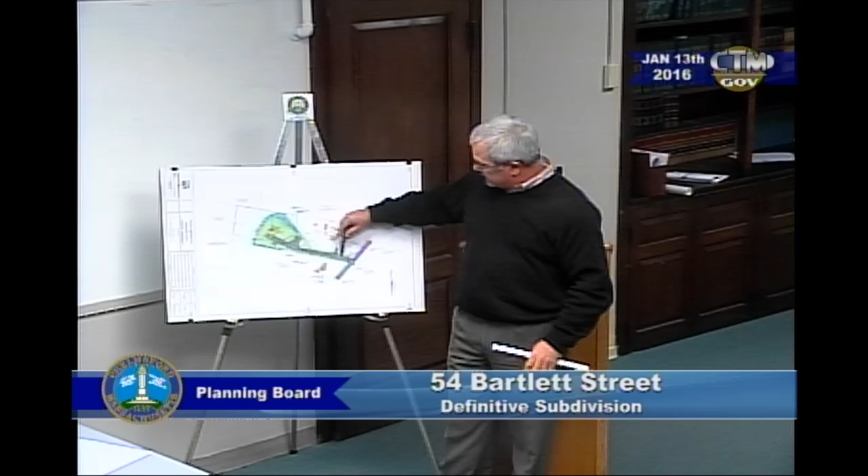There's a profile in the whole package. Roughly we go from about a 208 contour near where the new driveway intersects, and the contour about where the house is shown now is about 190, so there's about an 18-foot elevation difference over 200 and some odd feet. So the driveway itself is grading, except there's a leveling area of 2%, which is fairly level.

That's not over 6%, right? No, it is about 6% in this area. Okay, meets those regulations too. And then it flattens out at the T turnaround.

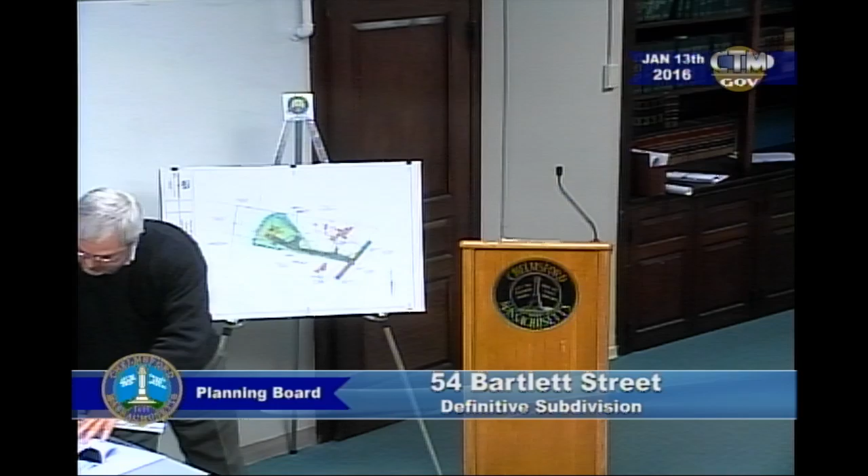If you look at the profiles, the lighter lines here are the existing grade, the heavy line is the proposed grade. And why that's done is to minimize, as we talked about before, some of that earthwork through this area. What we're gonna be doing basically is scraping off that top and subsoil, getting down to the parent material, and then putting in the road base and pavement base.

So what we're trying to do is minimize the amount of earthwork. Now you have a place to put the material. Yeah, exactly.

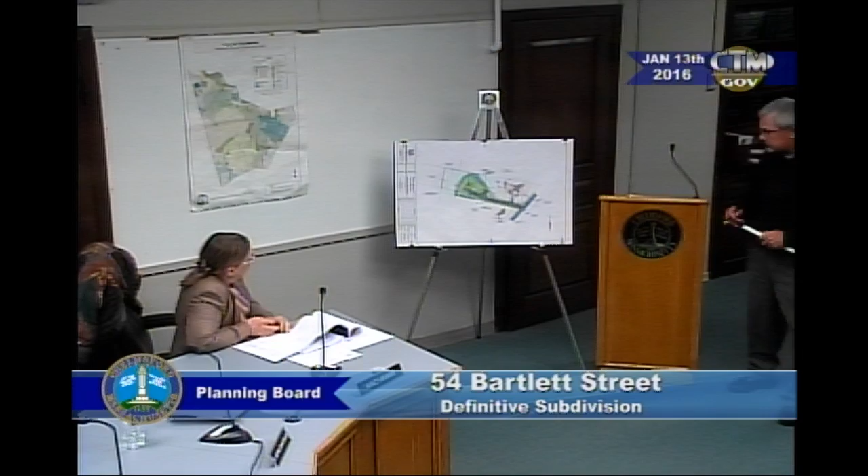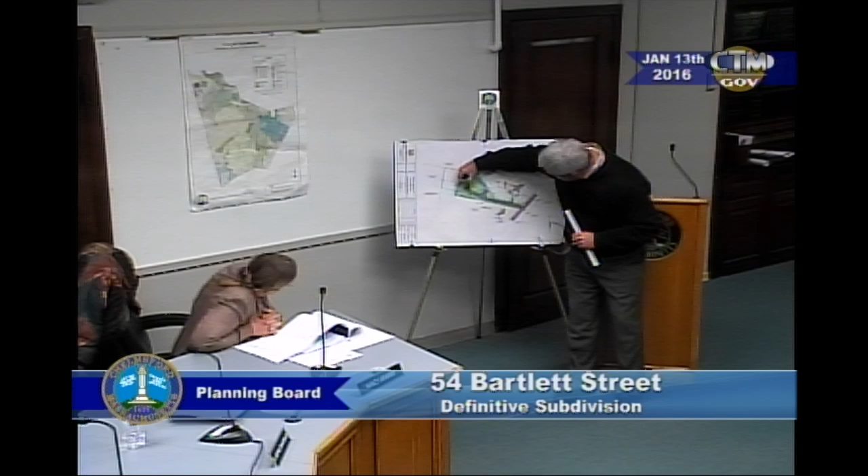How much does this lot drop off behind the end of the driveway then? So that's another, at the driveway we're talking about a 10-foot drop, about 192 here, and it's 182 there, so you can read it on another plan. Pretty good drop in the backyard. So it's fairly substantial, but that's through, I think these are 30 scale plans.

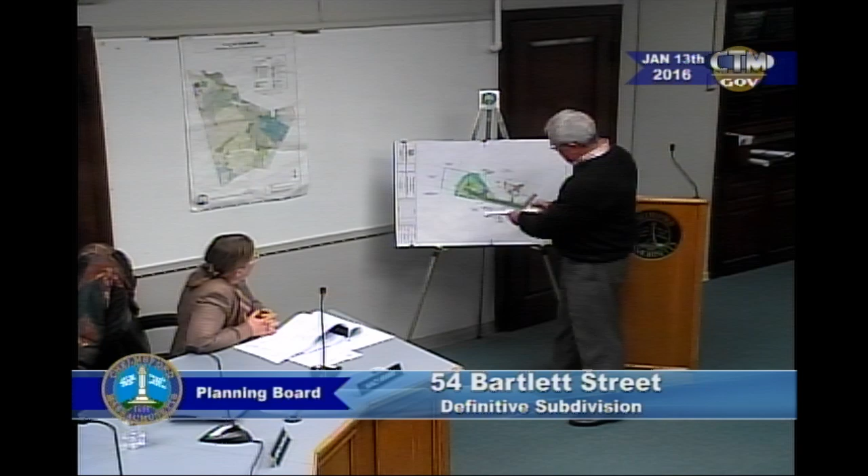House will be a walkout. Yeah, that's across another 150 feet. So it definitely drops off, but it's not steep, it's fairly gentle. It has interesting architectural possibilities for building. Oh, without a doubt.

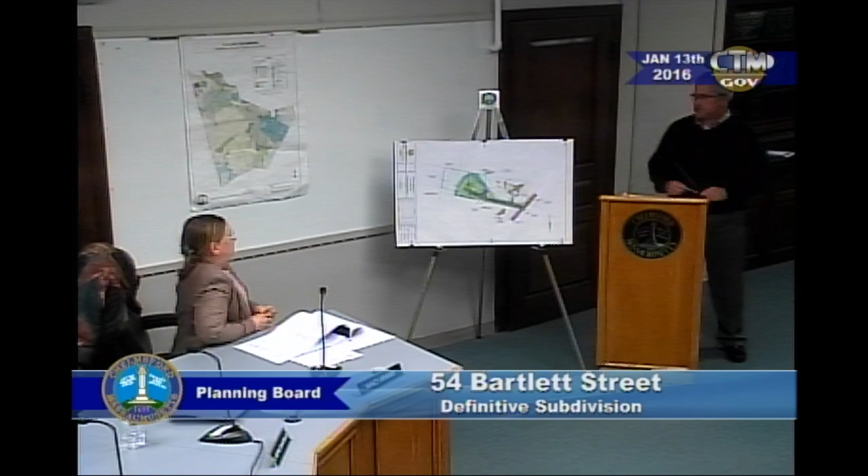I don't want to do a site walk if it's all ice. Yeah, I don't think we need it, I get it from the plans. Okay, we can go with that. I would encourage anybody to just drive by and get a picture in their head of what the site looks like. I'll walk over. May I ask one more question?

How much room does the fire truck need to enter into the driveway? Because there's a stone wall. They have that specified, and it's gonna be wider than what they've said is acceptable for their equipment.

So the opening of the driveway, how wide is it? Think of it as a fluted opening. The driveway itself is 14 feet wide, but there's radiuses on either side. And then we have to get rid of the obstructions on either side. So a 14-foot wide, I could scale it off, it's probably about 24 feet wide.

Evan, is Bartlett a scenic road? No, it's not. Might be a good candidate.

Okay, any further questions? All right, well, that being the case...

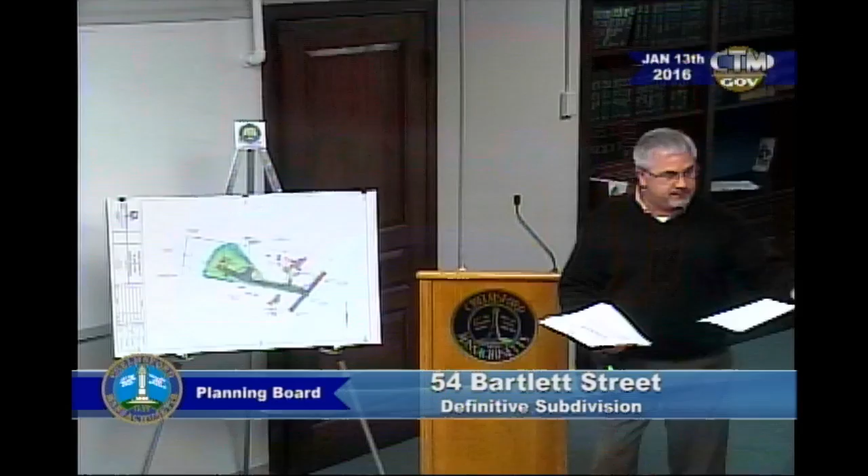Before you close, Mr. Chair, what I'd like to do too, just to make sure you guys know, one of the things in the engineering was the Form J, which is the covenant for the scenic or private road. If you look at the document, there's some information that needs to go in here about the date of the certificate of approval and whatnot. But for the file, I'd like to get that in. It certainly isn't going to be the final document until I get some more information to put in there. That's fine, but for the file, we know we have to do it.

I'll hand out the Form J. Thank you. All right, this is pretty standard Form J.

So, you had another question? Yeah, this is gonna be a question. We close the public hearing, I can make a motion to close, but do we need the public hearing open so he can revise his plans to show the berm and that kind of stuff, and the driveway, the way it's really gonna be? But you could require that as part of the Mylar prior to endorsement.

They submit and prepare the revised plans, and then when they request endorsement, the board will check it in endorsing. I think we all have a pretty good idea what we're talking about here. So, just as long as it makes it onto the Mylars, I can make it part of the motion too. Any other comments or thoughts?

I'm going to make a motion to close Planning Board 2015-17, 54 Bartlett Street, to close the public hearing. Second. Moved and seconded to close. All in favor? Aye. Opposed? I don't vote. You got the easy job.

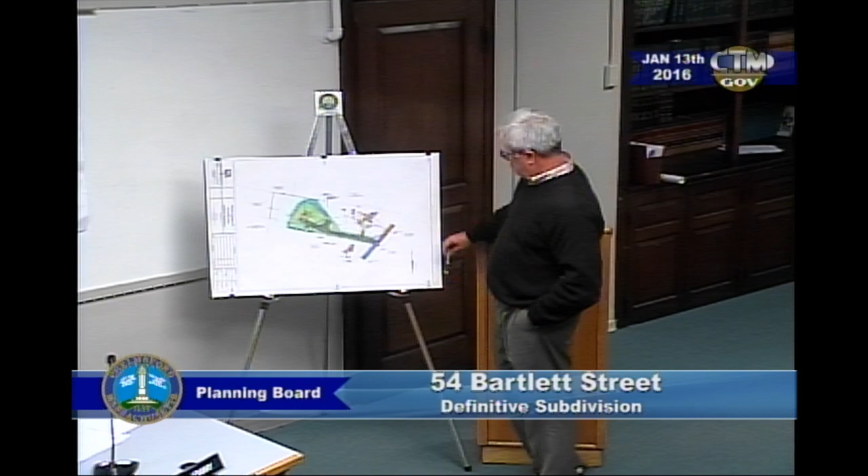Along the rear of the property, southeast, rear setback. So there's a no-cut zone at the rear setback of the property.

Two, that there's a berm approximately 3 to 4 feet high, planted with rhododendrons or dense evergreens from approximately the fire department tee to the abutter's house, with the abutter working with the contractor for specific placement of the trees and with consultation from the abutter.

And three, the third condition is that we revert back to the original driveway condition with two separate driveways, one for the proponent, the existing driveway for the proponent, and the new single driveway for the rear lot.

I think I got them all. Evan, did we miss one? Okay, second. We have moved and seconded. Any more comments before we take this to a vote? All right, all in favor? Aye. Opposed?

Before we close out, Mr. Chair, I got a question. The fire department letter, Evan, will that be part of the decision, or do I have to make a motion for that? I'll incorporate that, for the sprinklers, 'cause that's important. All right, well, I guess we have approved this.